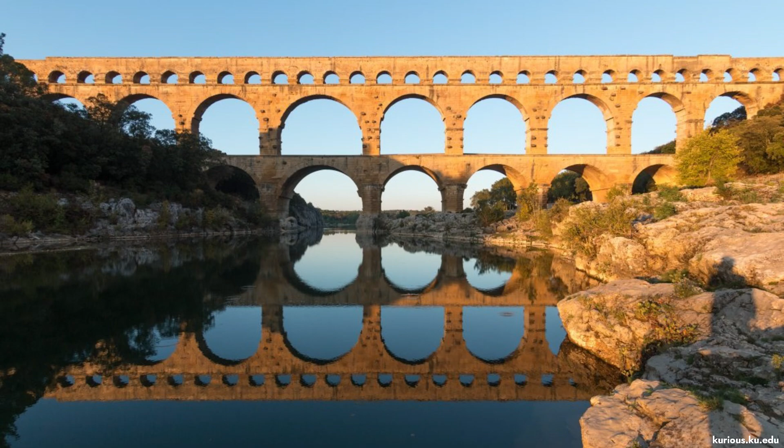Concrete is not a new material. We all know this. There's a lot to do about Roman concrete and its qualities and why it's lasted so long. And it's true, there's a lot of interesting properties associated with it, but one of the reasons why it had lasted so long was that the material was being really utilized in a way that makes most sense for what concrete is. Ultimately, concrete is a compressive material. It's rocks bearing on other rocks. The cement is what holds it together, but ultimately it's that aggregate interlock and pushing against each other in compressive forces that makes it work. And actually the lack of reinforcing in a lot of these structures is why they were able to last so long, because corrosion of the reinforcing is ultimately the downfall of a lot of concrete structures we see today.

One of my favorite buildings out there is the Ingalls Building in Cincinnati, Ohio. I did a project in Cincinnati, I was traveling there all the time, so I got to go check it out. It's been recently renovated into a hotel. When built in 1903, it was 16 stories tall, and people could not believe that concrete could support its own mass because it's so heavy. So there are stories about this entire building being built on shores all the way to the top. And they knew the date that they were going to pull those shores to see if it could support its own weight. And there were photographers lined around the streets to get that photo of this thing collapsing in on itself, which of course did not happen. It's a very interesting building. I recommend you check it out now that it's a hotel.

But a great case study in why concrete makes sense in a vertical application, because of its compressive nature. Stacking concrete and load bearing in a compressive way on columns makes a lot of sense. And of course, the sky's the limit now with the Burj Khalifa, the tallest building in the world.

I was super fortunate to work on that project, my first day in the office at SOM. My boss at the time was very dramatic. He was like, all right, we got to deal with all these RFIs, we got to make these things happen. And it was very exciting.

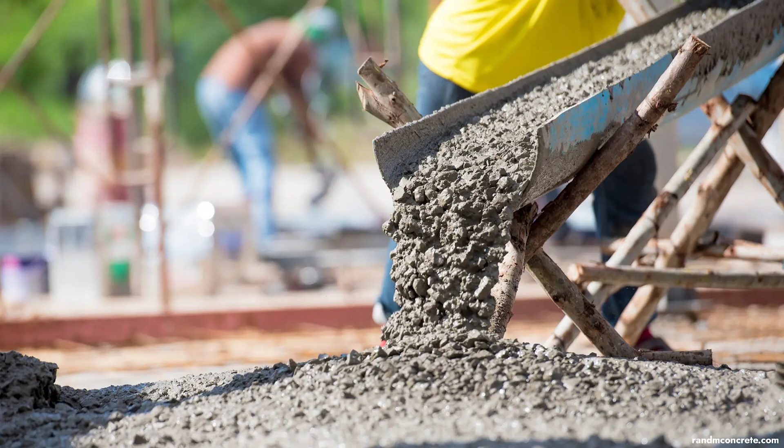Yesterday I listed the mixture proportions, very simple for concrete—I believe it was 1 part cement, 2 parts sand, and 4 parts aggregate. And water is a very important part of the mixture, about half a part; that water to cement ratio is really important. But ultimately, at the end of the day, it's rocks bearing on rocks in compression—that's what concrete is. The cement and the rest of it is just trying to prevent it from bursting, to prevent those rocks from slipping away from each other and splitting as you go through. So that cement is really just something that enables the full capacity of what that concrete can be.

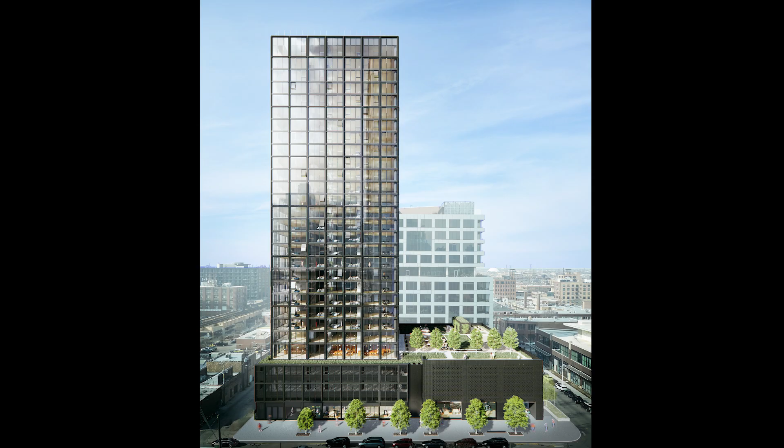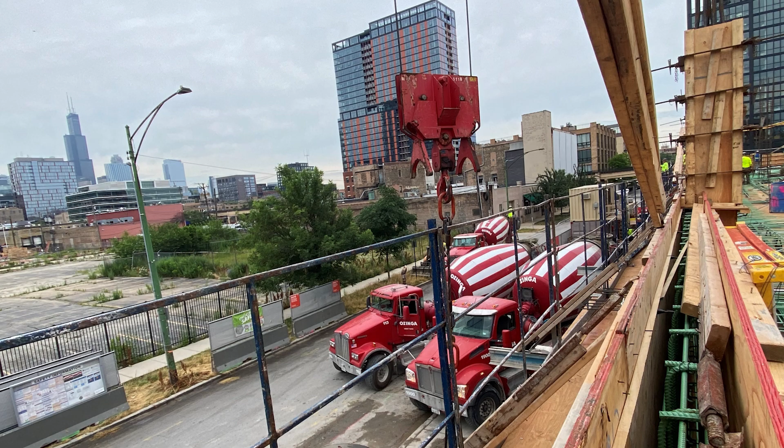And so as that building is going up, you just got the concrete trucks parked up. They're not dumping it into a hopper, they're dumping it into a bin that's pumping it up to the top. So you have continuous concrete placement from start to finish. Watching these buildings go up is incredible.

The tradesmen have an unbelievable amount of knowledge that you do not get in the design studios. Each one of these floors takes 3 business days to build. Day 1, they build the formwork. Day 2, they put the reinforcing. Day 3, they pour the concrete, and then they start again. 3 days at a time. All incorporated in that is all of the in-floor plumbing, the conduit. It is an amazing dance of all these different trades working together.

And so to that end, concrete material strengths have become really important, but it's the high early strength that we care most about. This building has concrete slabs with 8,750 PSI strength, stronger than any of the concrete in Marina City. It's being done so that they can stress those tendons and advance as quickly as possible. The strength of concrete we use just in a horizontal application was the dream of the concrete industry to go vertical just a few decades ago.

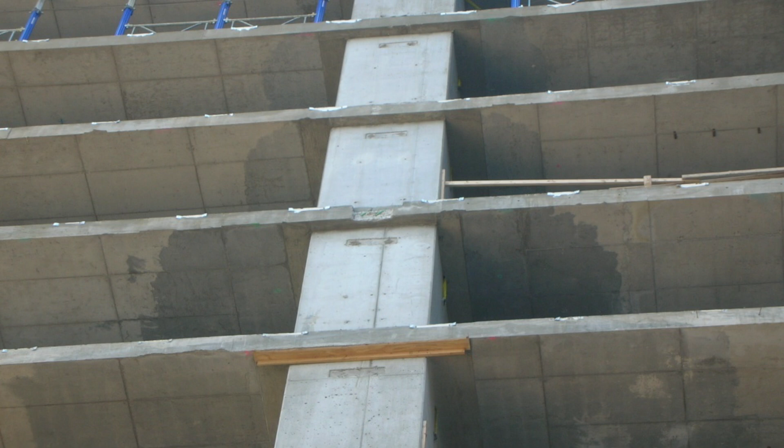Another innovation has been just about stripping away anything that slows us down. This is a photograph not of 220 Ada Street, but another prominent project here in the city, where the concrete slabs wanted to be a 5,000 PSI mix, but the vertical concrete wanted to be a 14,000 PSI mix.

And if you have a concrete column and interrupt it by a floor, that 14,000 PSI concrete column will crush that 5,000 PSI floor. So what they do is a pretty rudimentary strategy, which is they get a bucket of 14,000 PSI and dump it where the column goes while they're pouring the floor slabs. If you look at that column stack as it goes up, you'll see a discoloration between a lightly colored gray, that's the 5,000 PSI concrete, and a more darkly colored mushroom, as they'd call it in Australia, of the 14,000 PSI concrete. That's how you go up.

But that really slows things down. A friend of mine, Paul James, would say that puts sand in the gears. That's a Paul James saying. You got to get the sand out of the gears, is what he would say.

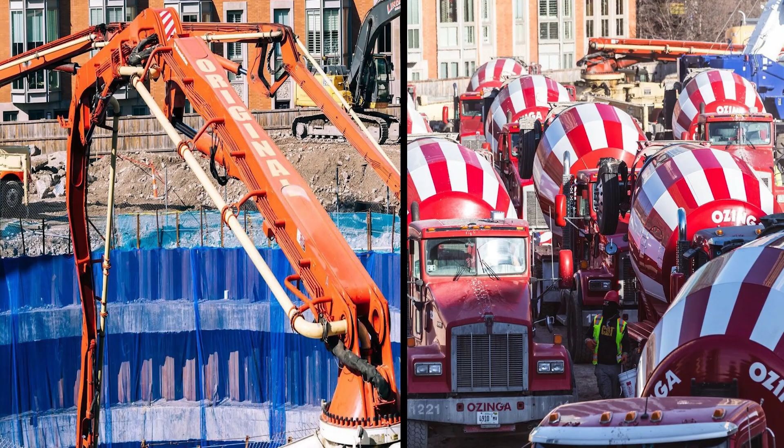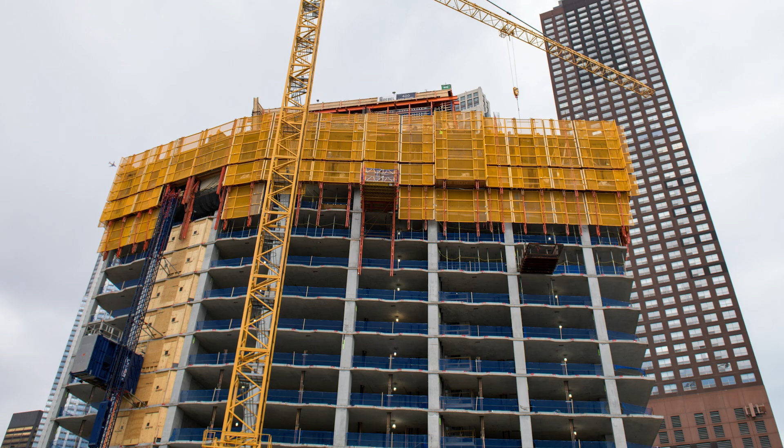So you really do not want to just throw concrete down a hole when it's a high-performance material. You want it to be controlled. So even though it's the simplest thing in the world, drive a truck up and dump the concrete in a hole, we still choose to pump it so we can place it precisely to avoid those kind of challenges. Here's that construction process as it goes up - same criteria, a 3-day cycle, post-tensioned and all the rest of it. But in this building, we're actually using 10,000 PSI concrete on the lower level slabs to avoid all that puddling, to avoid all that mushrooming.

So the innovations over and over again allow us to use those 15,000, 16,000 PSI mixes. Now we tune the floors and the columns because speed of delivery is really the key to success on these buildings. So when I think about all the concrete innovations that got us here today, I put them into four major groups.

I'd say concrete performance and high strength concrete, post-tensioning cables, the ability to pump concrete so you don't have to rely on the crane, and self-advancing semi-autonomous formwork systems that climb up the building and get it built.

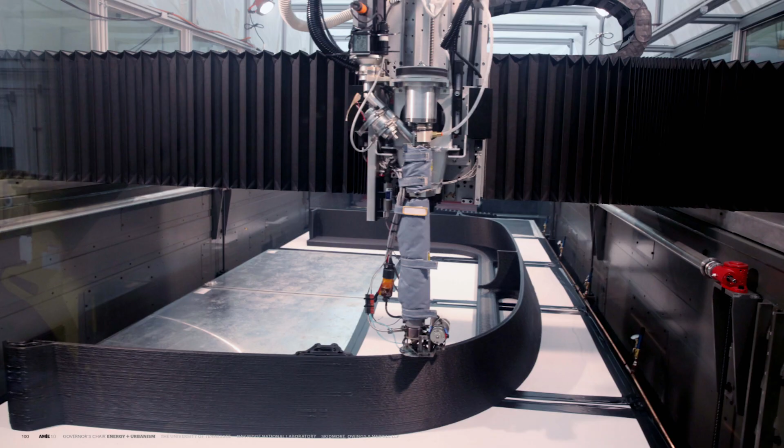That's kind of an obvious corollary to what I'm going to talk about next, which is 3D printing generally, but concrete specifically. This is an image of 3D printing at Oak Ridge National Laboratory. This is a carbon fiber reinforced ABS material that we did as a demonstration project for the DOE.

We 3D printed that building on the left in a bunch of different segments and then post-tensioned it together for good measure. We 3D printed that little staircase that you go up, and we 3D printed that Jeep as well. You can see the oak leaf on it there.

At the time, it was a really nice reunion because Phil Enquist, who was the governor chair at the time, we pulled together all this great imagery from back when SOM was young and helped design the Oak Ridge campus. So it was this kind of reunion of these old firms.

As an outcome of this effort, we put on an exhibition at the National Building Museum called Secret Cities, about the development of Oak Ridge and the atomic bomb.

As a result of that collaboration, we got another government contract with the U.S. Army Corps of Engineers, at the Construction Engineering Research Laboratory, which is right there at the UIUC campus. There's a lot of changeover between the UIUC campus.

They approached us to say, look, we've been experimenting with 3D printed concretes, and we'd really like for a design firm like you to take a look at it from a first principle standpoint, talk about code development, how we could get this thing over the line.

They had already 3D printed this building, which we were not involved with, and they built it inside of a shed, so it's protected from the wind. Straight extrusion walls, got a wood roof on it, all that kind of stuff, and it's got these really crude connectors around the outside.

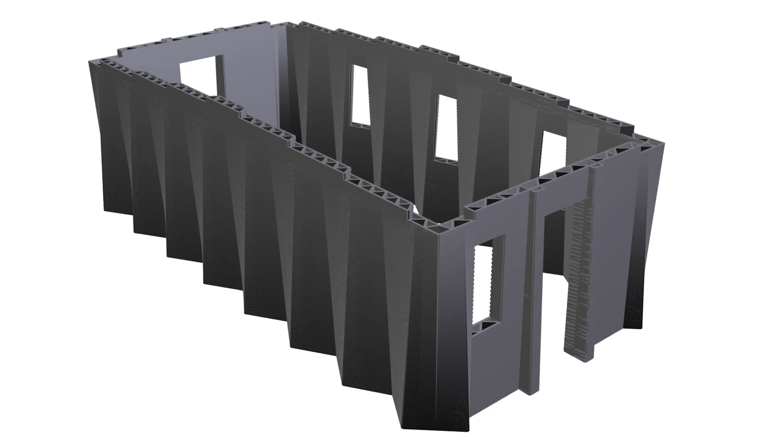The nice thing about that is that when you talk about 3D printing, you just want to show up and do it, right? You don't want to have all these other systems that it relies on, so it unencumbers the concrete walls from the rest of the building systems to support itself.

So we wanted to do this demonstration, which was a 24-hour print. We were going to start at 10 in the morning and go to 10 in the morning the next day to show and demonstrate this technology.

This was the first run. You can see this morphing wall that starts as a corrugated pattern and goes up to a straight wall at the top. And it was damn hot that day. I mean, it was not fun.

You can see the concrete mix there is kind of slumping a bit, right? And you can see all this kind of purple curing and sealing compound on there.

The trick of 3D printed concrete is really not the robotics, it's the material science. How do you get concrete to sit on concrete that has just been placed so it doesn't smush everywhere, but it's got to be liquid enough that it forms a bond, and then you've got to run ahead.

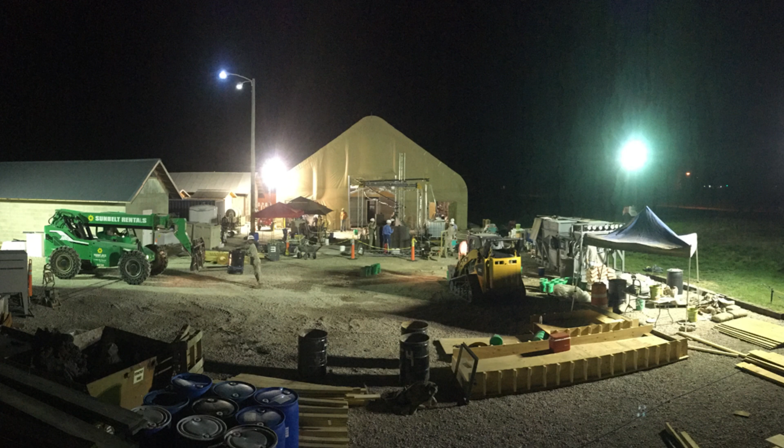So it was difficult during the day, and then it was tough during the night. This was the operation. You can see the printing that's happening on the left there. The Sunbelt Rentals, they're loading it in. On the right-hand side, beyond the tent, that's their admixture apparatus that would put all these things together.

I climbed up on some old barrels to take this photo. It was like midnight. Just watching them go ahead, it was pretty incredible.

The Army Corps called in the Marines to help because they wanted to have it kind of like on-the-job training. These guys had never really done any 3D printing, but they said, we want to come in and take care of this.

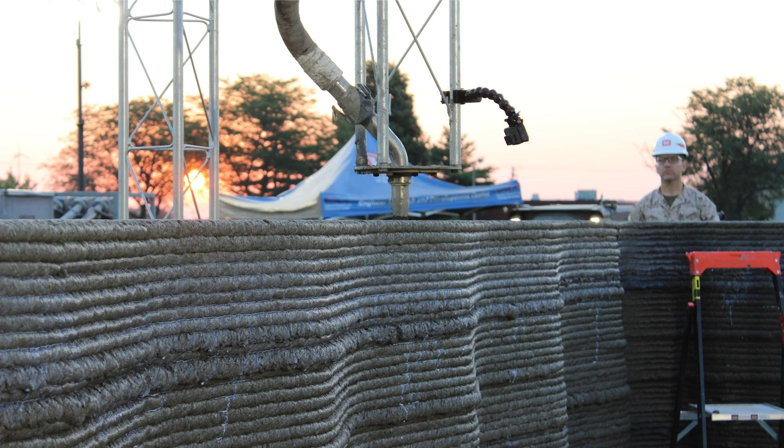We printed through the night, and this was dawn. I got up on a ladder to try to get this perfectly, with my cell phone. I'm like, I've got to get this line of printing exactly perfect with the sun coming up. And Captain Friedel is in the back there.

What he's doing is controlling the speed of the printing, because depending on the quality of the mix, if it's too loose or too tight, you've got to go faster or slower. So he was driving the ship by the time we got through the morning.

And that's what it looked like after the fact. Pretty rough. 3D printed concrete has come a long way, but I think it's a really nice demonstration of what can happen next. In Eaker's talk, he was talking about the fabric forms and the plastic forms and all these different things. It really is new technology that drives new architectural forms, and certainly 3D printing concrete is a very attractive option moving forward.

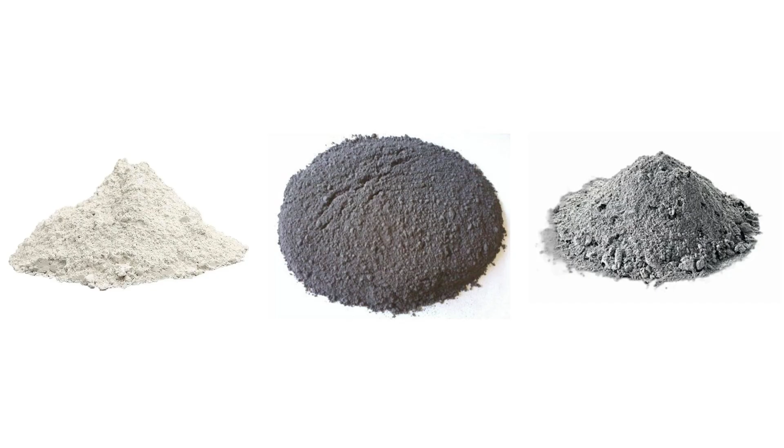On the left-hand side is ground granulated blast furnace slag, a byproduct of creating steel. In the middle, we have silica fume, a byproduct of creating silicon components. And on the right-hand side, fly ash, a byproduct of burning coal. All those things are pretty tough.

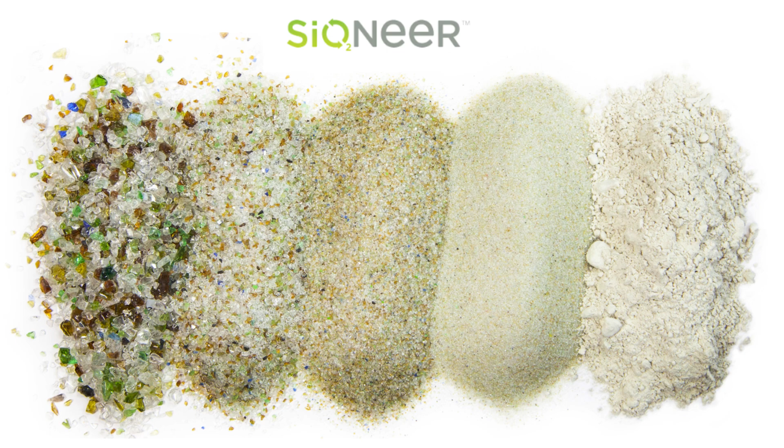Putting those things together, we've been working with other companies on how to do this, like Sioneer. They're looking at replacing silica fume by using ground glass, recycled glass, to get it down to its constituent parts as a cement replacement, getting that carbon out as a waste product from another industry, but not a waste product from an industry that's burning coal.

I did want to talk a little bit about another company, Prometheus Materials. They're looking at using algae-based cement replacement, where you grow this algae, dry it out, grind it up just like the others, and then add in some other components to get this cement.

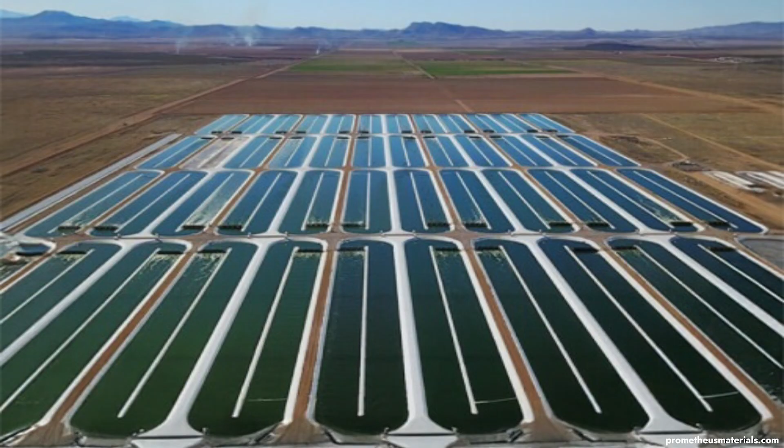At the biennial a couple of years ago, we wanted to showcase this with a pavilion we called the BioBlock Spiral. We used research from some test builds using it as a block form. It could be used as concrete, but we studied it as a block in an exterior application.

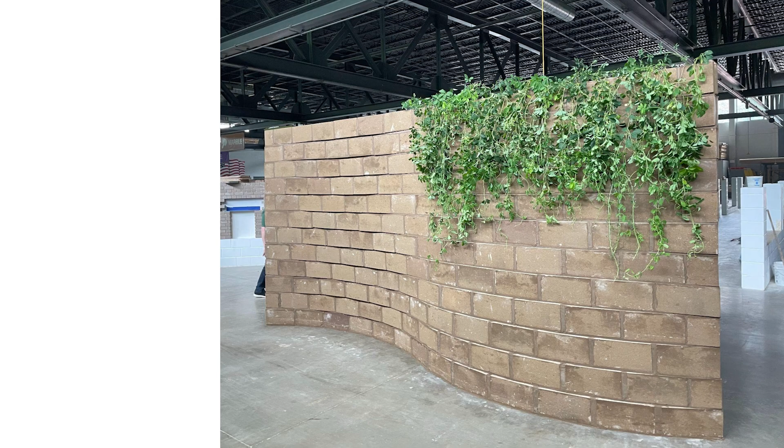For the biennial, we built a demonstration pavilion in the Fulton Market area, where we wanted to look at the acoustic properties of this material. It's more acoustically absorbent than traditional cement, so we looked at some different forms and settled with this spiral here.

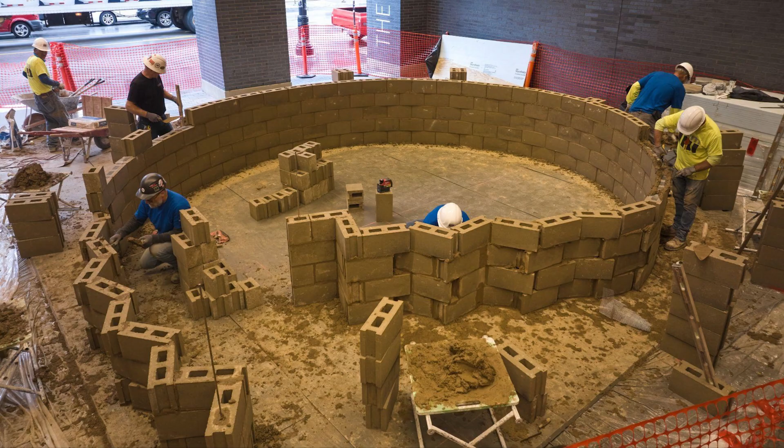Although it's a unique material, it goes together just like conventional blocks. Here are some construction photos of it going through. It's got an earthy smell to it when you're making algae-based cements, and that's that.

And lastly, I wanted to talk about just two other things. We're talking a lot about concrete buildings and concrete frames, but concrete is everywhere, and it is ubiquitous. This is a very well-known building in the city, obviously made out of structural steel.

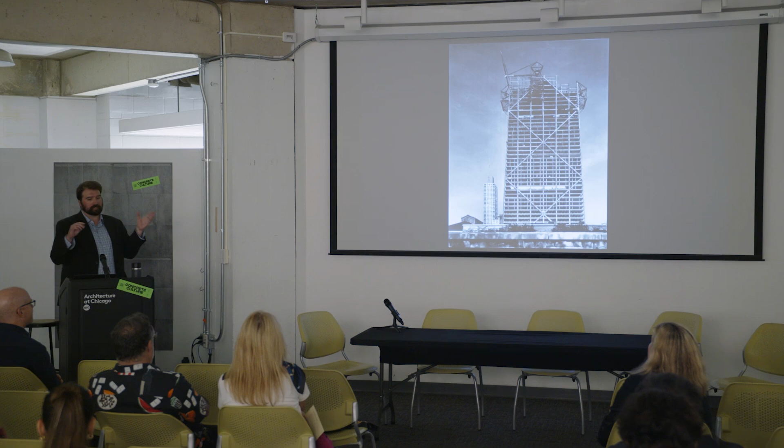Going back to the idea of how concrete is made with one part this and one part that, by weight this is 2-part steel and 3-part concrete. There are lightweight concrete slabs in this building, but most of the mass comes from those slabs and not the structural steel frame. Here's an image of level 16 about ready to get poured with all the rebar in there, and you can see the formwork placed in there.

It wasn't using composite metal deck. If you think about that steel beam, it's there to hold up the heavy concrete slab. That steel beam is held up by a steel column, which is braced by the steel mega bracing. All of the mega bracing is holding up the columns, holding up the beams, holding up the slab. It's the slab where you have most of that mass, so we try to attack that material to make it more efficient, including in timber construction.

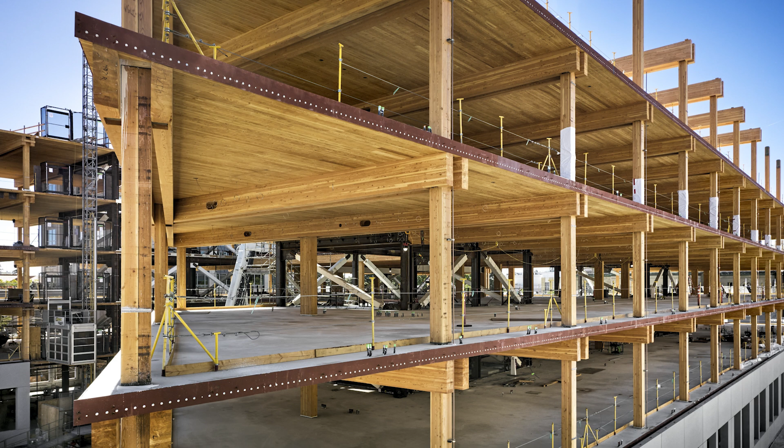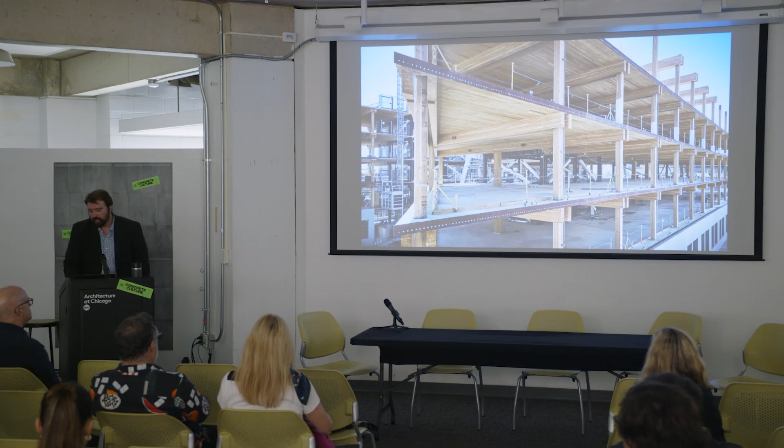Concrete is great because it has really nice acoustic properties. There's a building of ours in California where, although it's an overall mass timber frame, we have non-structural concrete topping slabs that help level out the floor, allow for electrical boxes, and give other nice benefits, but it was not made structural. So looking forward about concrete, it's not just about concrete frames, in my opinion, it's concrete in all of its applications. We've been doing a lot of first-hand research on timber-concrete composites, where we take a timber element and reinforce it with a concrete slab using specialized connectors, so we can both increase the performance of timber structures to be more compatible with other building frames while using less and less concrete along the way.

Okay, that's what I had for you. Thank you.

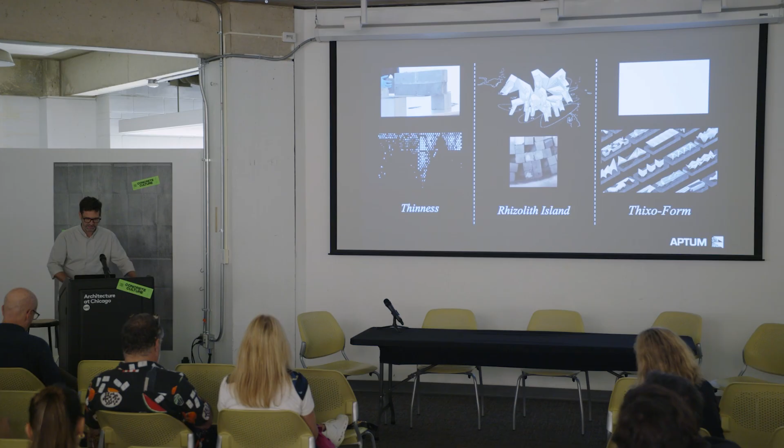In what follows, I will present three approaches, each based on concrete mix technology that alter typical standard reinforced concrete towards a specific performance. Broadly, the first is the idea of thinness: slender and delicate, based on an increase of flexural strength of the mix. The second, Rhizolith Island, explores buoyancy and delicacy, based on mixes that focus on density and porosity. The third, Thixo-Form, works with foldable concrete made possible by precise control of mix workability—each intended as an experiment in the reimagination of concrete's agency.

We see these investigations not merely as a formal exercise or technological demonstration. Each is a proposition about how we might draw other futures into the scope of our present moment. Digital fabrication, environmental performance, and the tectonics of assembly are treated here not only as means to an end, but as sites where material, form, and environmental context dynamically negotiate with each other in real time.

In collaboration with CEMEX R&D, for an exhibition at the California College of the Arts in San Francisco, we developed this small pavilion called Thinness—an ultra-thin concrete pavilion that pushes spatial structure to its limits. Here, structural capacity is achieved by a skin whose very thinness redefines its strength principles. Cuts articulating the roughly 1.5-inch-thin vaulted surface are designed to dramatize the skin as structure, here compared to a typical concrete wall at the same scale, marking a deliberate shift from the traditional massy volumetric conception of concrete toward the filigree, tactile, and fragile.

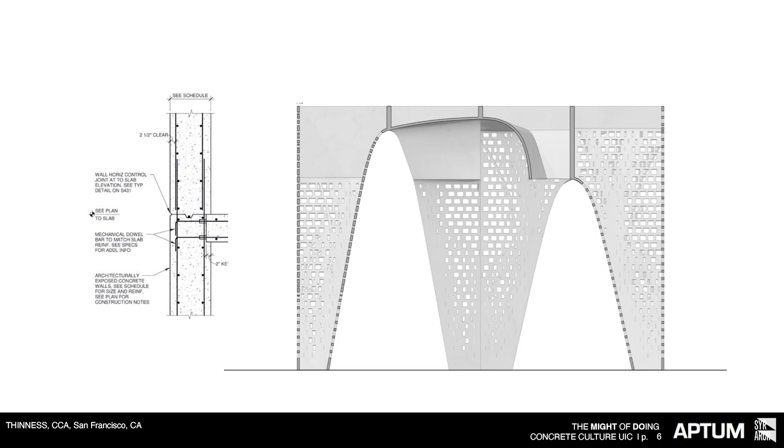Similarly, when a column 9 feet in height can be carried by 2 people, the act destabilizes deep-seated associations of the material with weight and inertia.

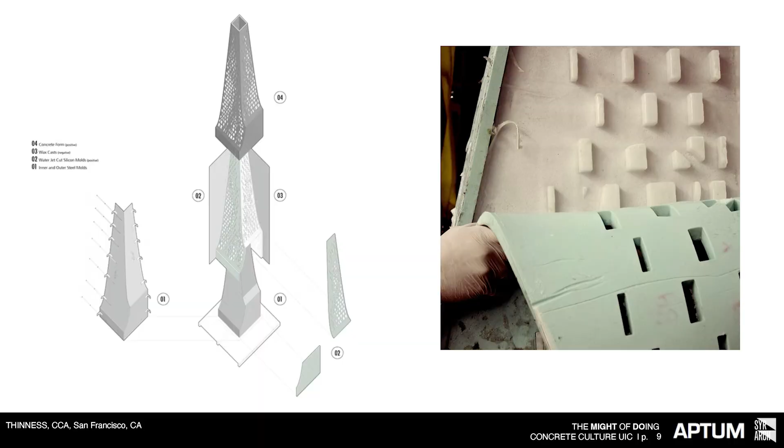Behind these apparent performances lies a multi-pronged iterative methodology combining computational modeling, experimental material science, and tactile craftsmanship. Computational tools allow complex simulations of stress, strain, and failure in ultra-thin shell surfaces before any physical casting, enabling optimization far beyond traditional empirical boundaries. Concurrently, research into concrete mix development—adjusting particle size distributions, fiber reinforcement types and quantities, admixtures, and curing protocols—is extremely important to ensure the material can meet these radical formal ambitions without premature failure. Finally, the craft of making—the delicate moments of pouring, supporting, folding, or lifting—constitutes a mode of embodied knowledge and feedback, a dialogue between design intention and material response that enriches rather than merely confirms the computational models.

This cyclical research-fabrication dialogue offers a challenge to the conventional architectural workflow, which often accepts material properties as a fixed, given aspect of products and systems rather than variables to be interrogated or recalibrated.

In the Floating Rhizolith Island project, we interrogated the long-standing presumption that heaviness is concrete's defining physical characteristic and constraint. By introducing lightweight aggregates, air-entrained technologies, and unconventional casting protocols, we induced buoyancy, enabling concrete elements to float. These buoyant concrete modules serve as experimental platforms for exploring both the material's structural boundaries and its expanded ecological agency.

Here, the reimagined concrete raft becomes a living substrate designed to support and accelerate mangrove and oyster restoration efforts in vulnerable coastal ecologies. This proposition challenges the traditional notion of concrete solely as an inert, static, and often environmentally destructive material, repositioning it as a potentially regenerative agent in climate-adaptive landscapes. Its failure is intended to be part of the stabilization of the habitat it provides.

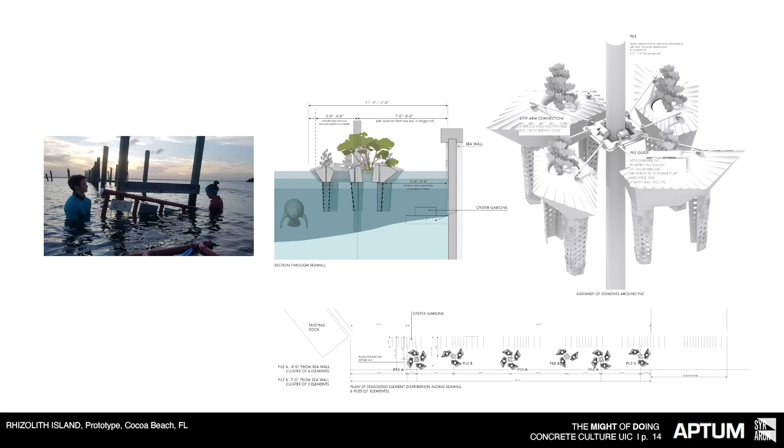We developed this together with the Smith Group Coastal Engineering and the municipality of Cocoa Beach, who reached out to us and wanted us to work together with them to investigate the possibilities of these systems. They were tested together with local marine biology researchers to see in what way the concrete could be a good substrate for oyster growth.

You see some of these testings on the very left. We installed a series of small prototypes that were pre-spawned for oyster growth and tested for mangrove development.

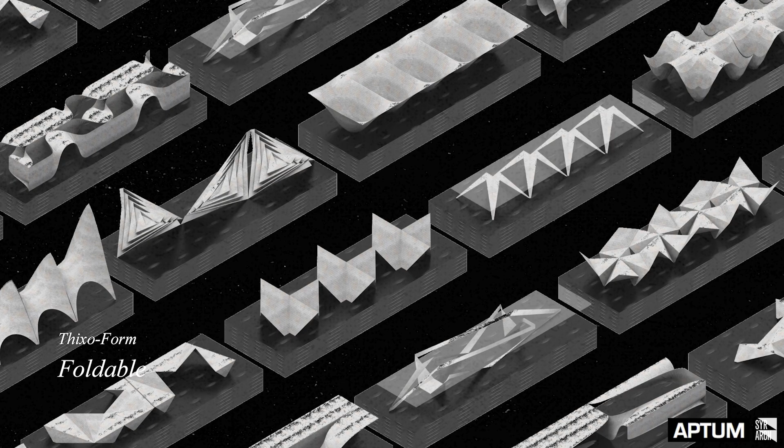The third and most current experiment, Thixo-Form, explores folding not only as a structural strategy—such as folding typically used in concrete, for example in Felix Candela's projects, or as we saw yesterday with Miguel Fisac's incredible project that Iker talked about—but as a fabrication process in itself.

Folding increases structural strength and stability without increased mass in various materials like paper, metals, or fabrics—anything you can fold. However, in concrete, folding has historically been more simulacral than literal, cast into static molds designed to give the appearance of folds without the material itself undergoing actual folding deformations.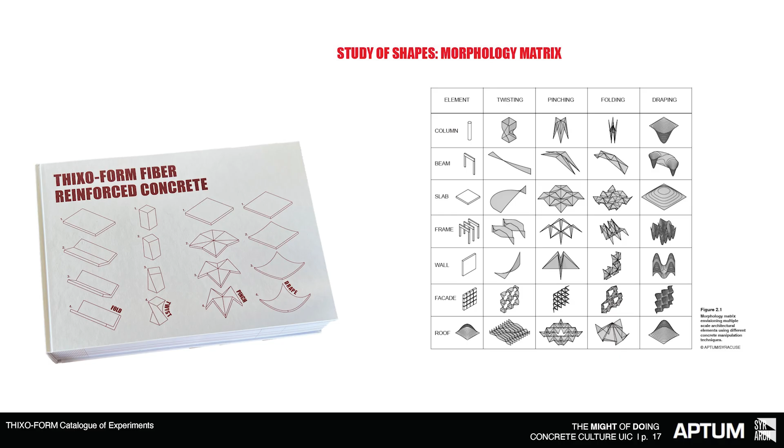Thixoform, in contrast, uses innovations in concrete mix flow deformation properties, particularly thixotropic, or the time and touch dependent behavior of the mix, that allow a literal folding during the curing process of the concrete. This approach broadens both formal repertoire and construction economy.

In a kind of folding playbook, we documented a whole series of experiments that explored how this fabrication method might cultivate mass reduction, simplify prefabrication workflows, and facilitate disassembly or reuse.

Institutional constraints, such as building codes, long a bottleneck to experiment-driven innovations, are gradually evolving. Newly emergent standards covering fiber-reinforced systems like carbon fiber-reinforced polymer (CFRP) or steel fiber-reinforced concrete (SFRC), and revised cover and durability requirements, become instrumental for legitimizing these advanced concrete applications.

From these experiments, I want to showcase two in more depth: a first one that explored robotics at the Autodesk Build Space in Boston, and a second one we are actually working on right now that builds upon the Autodesk work and strives to develop a Eurocode compliant precast structural system for a very small carport structure.

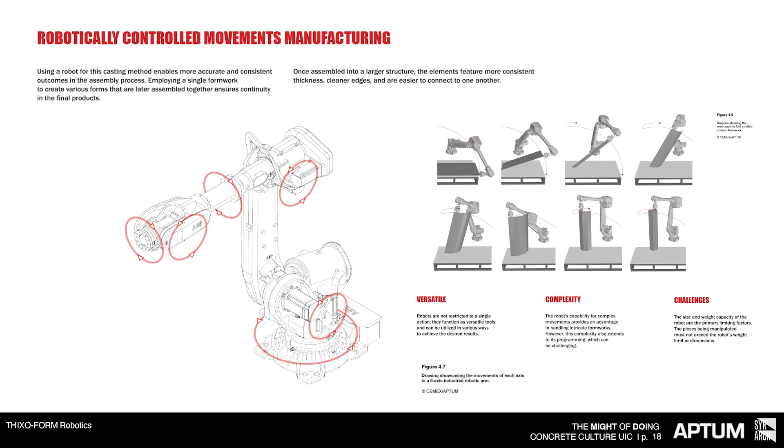At the Autodesk Build Space, the folding was realized through the use of large-scale robotic arms, allowing for the needed amount of payload to lift the material. So we required a very large robot.

A key aspect of the cast is the relationship between the curing curve and the speed and orientation of the arm movement. That has to be finely calibrated so it wouldn't slump, guaranteeing a smooth transition from unfolded surface to three-dimensional casts without slumping of the mix in the formwork.

The intent is that the resulting elements can be assembled into complex spatial configurations. The first prototypes demonstrated the technique's feasibility, both in terms of process and the precision of the pieces themselves, allowing for consistent output and concise assembly.

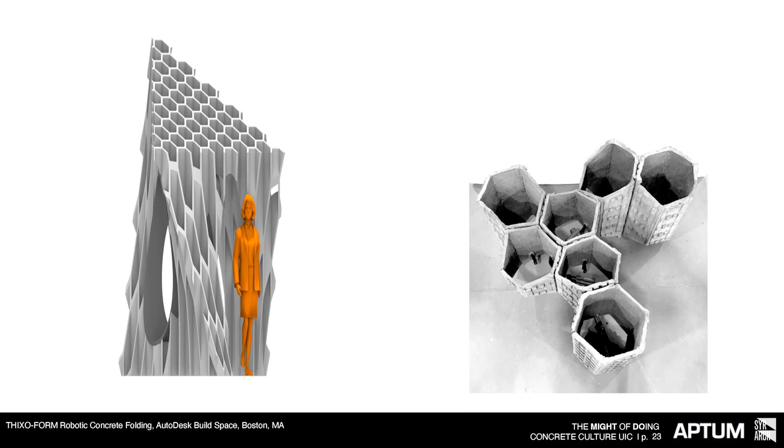Based on these initial studies, the aim was then to develop a robotically folded concrete block system that interlocks with a uniform pattern, providing a friction-locked connection between the blocks. We tested the system through the design of a small-scale pavilion.

For that, we developed a script that takes any volume and translates it into the information needed to fabricate the pieces, automatically splitting it into the needed amount of blocks and providing the unfolded geometry for the casting process. You can take any kind of closed polysurface into Rhino, and it automatically generates the geometry, dividing it so the heights of the modules coincide with the maximum length of the formwork, which is again a function of the payload of the robot.

This is cardboard. Due to the COVID pandemic, work at the build space had to stop. But at least we were able to use the time during the pandemic to build this cardboard prototype.

Still hurts a little bit.

At least this prototype was kind of similar to a theater ghost, occupying the atrium of our school during the quietest time during the pandemic.

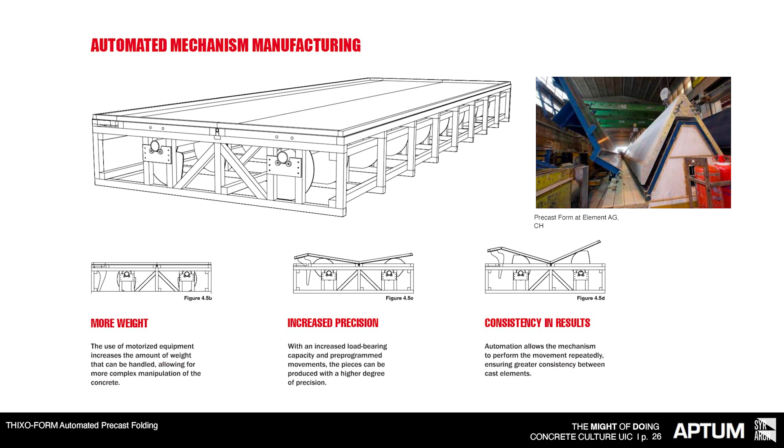Building upon the knowledge and experiences we made at the Build Space, we are currently working towards an industrialization idea for Thixoform. The goal is not to design a completely new fabrication process, perhaps slightly different than 3D printing, but to insert it into the already existing precast plant workflow.

On the left, there are some initial ideas of the kinds of machines we imagine could be built to fold the elements, and on the right you see actual precast formwork. This is a formwork that closes up for a rather complex concrete frame for a gym in Switzerland.

As a catalyst, we are using a request for the design of a solar roof canopy that we had. For us, this is ideal since the scale is rather small, but it requires serial production, code compliance for multiple locations, not just one, ease of assembly and possible reassembly, as well as integration of a minimal amount of climate and technical installation considerations.

But it was also very important to us that the process, like in the robotic folding project, would allow for formal flexibility, attempting to work towards the integration of a digital to physical workflow.

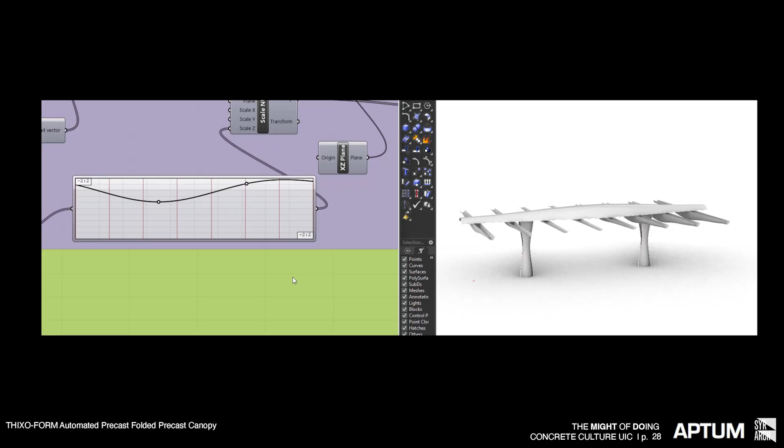What you see here is a very early model to conceptualize this approach. We decided that for now we really focus on the development of the technical aspects of the fabrication process of the elements itself, with the intent to revisit this way of thinking about the relationship between digital and physical workflow once we know exactly the parameters given by the fabrication process.

So with the aim to keep it as small as possible, the prototype is then intended for just one car.

The structure is based on two columns that support a beam spanning 11 feet, supporting three cantilever joists about 19 feet in overall length, with the larger cantilever measuring about 12 feet. This, compared to the work shown before, is very, very small.

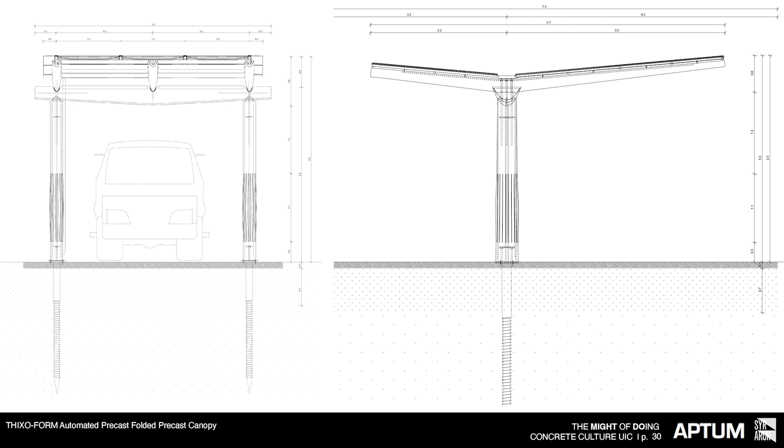The elements are intended to be assembled with typical rigging, joint and bearing pad components that are standardly used in the precast industry.

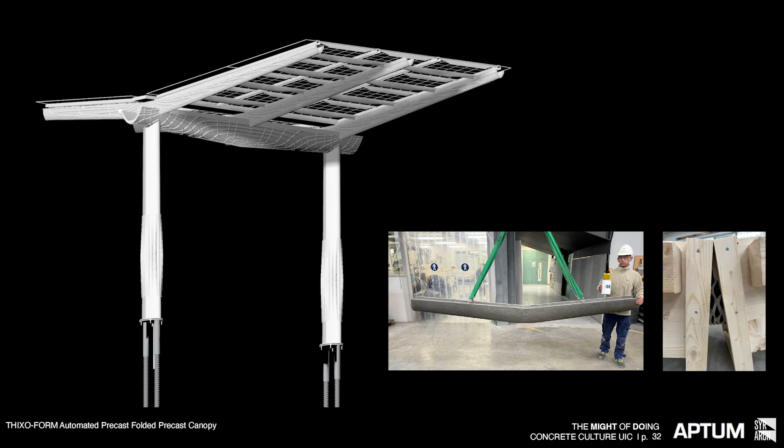The major challenges are to create a fabrication process that increases the amount of formal outcomes by inventing formwork that can fold to varying degrees and allows for simultaneous bending in the opposite direction of the fold, as needed to generate the inclines of the cantilevers.

The limiting factor for the thickness is not actually the concrete, but rather rebar coverage, which was reduced by the introduction of the Eurocode—I think this was 2021, the Generation 2 Eurocode—allowing for more slender dimensions and, with that, also a kind of weight reduction.

The engineers working on the project are also continuously testing prototypes of the folded elements against their calculations, to build out a more general data set that can be used for future applications, testing the structural limits beyond the occurring loads in the carport itself.

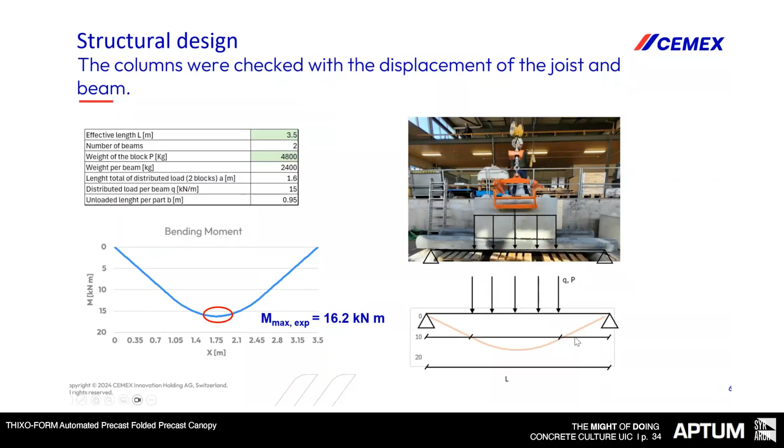While the folding provides for a weight reduction, the fabrication method also allows for very easy ways to adjust the forms of the members through cost-effective foam inlays that are independent of the larger reusable formwork. This, for example, enables complex interlocking geometries between the columns and the beams.

Another challenge is the requirement for continuous rebar in the tensile zones. By ensuring they are embedded in the outer edges and creases of the members, and otherwise using fiber reinforcement, we can avoid complex rebar bending that can pose a major planning and labor challenge in traditional prefabrication.

We are most currently also looking into an option to use—this is the rebar here, and this was just sent to me yesterday—CarboDur, a carbon fiber laminate, to replace the rebar. This is also made possible through the latest Eurocode implemented in 2021.

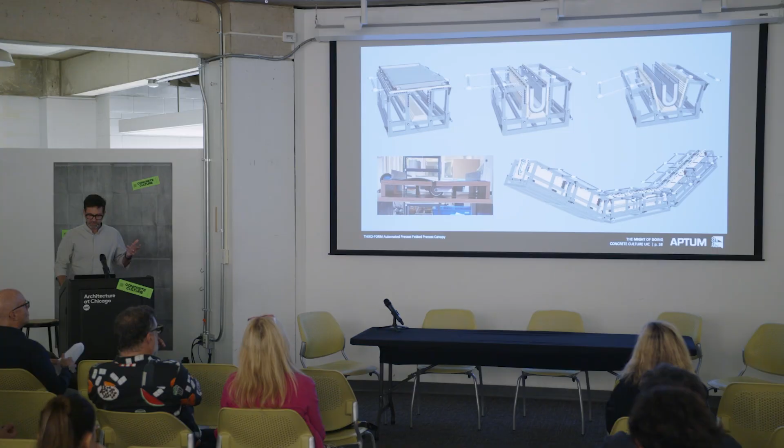We are in the process of scaling up the mechanical aspects of the work, allowing us to automate the folding process in an effort to control the relationship between mix and formwork movement. Simultaneously, CEMEX is also working on the development of a special coating for the foam inlays that will allow the casts to create intricate patterns.

In this case, an abstraction of the principal stress lines in the joists, the cantilevering joists and the beams, with the intent to reduce material where it structurally is not necessary. And this is a few early prototypes of that, showing the pattern and the reduction of material thickness between the stress lines.

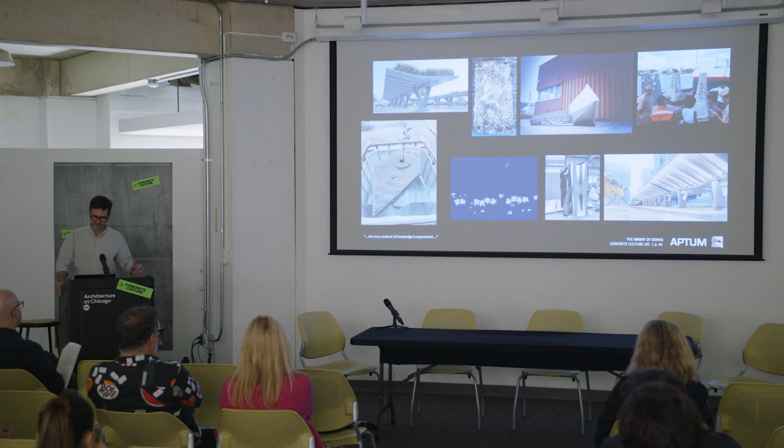So, in conclusion, if the earlier sessions of this conference have rightly focused on what we did and what we are doing, then perhaps the proposition here for the might of doing aims to demonstrate that to do by prototyping, experimenting, and making is itself critical form of research and intervention to shape the future. The speculative, the unfinished, and the provisional are not detours from architectural practice, rather they are a foundational condition for its ongoing renewal and recalibration.

As material futures become increasingly negotiated arenas of ecological urgency, technological evolution, and inherited disciplinary knowledge, agencies must be understood not only as what is selected, but also as how those choices are enacted and prototyped, shared, and made accessible to broader architectural and industrial communities. The might here is not some abstract potentiality, but a collective strength grounded in sustained, careful making.

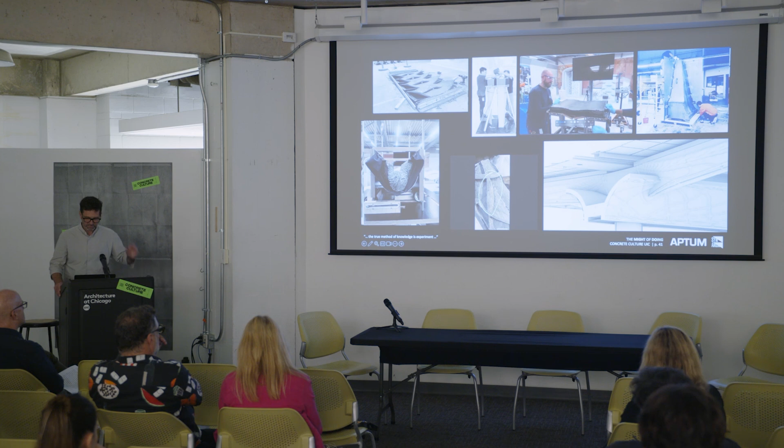We see this work as a contribution to larger discourses of work by others. I'm sure we're going to see an amazing presentation just after me, that is also focused on materiality and uses small-scale prototypes, pavilions, and projects as modes of investigation.

As part of this larger endeavor, we believe that reimagining concrete is to reimagine the architectures and ecologies it may responsibly sustain. By attending with rigor and openness to the might of doing, we become curators of futures in concrete culture that are not predetermined, but remain contingent and very much ours to experience and shape through experimentation. Thank you.

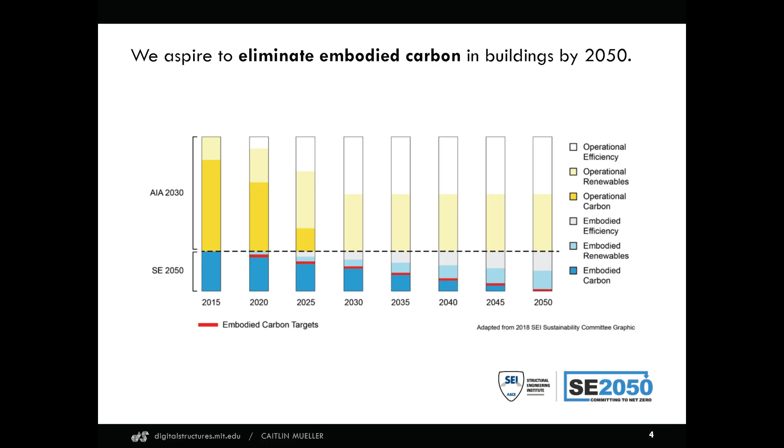A big part of the strategy here is to use more renewables to produce materials. This kind of green concrete and green steel movement is mostly the idea that architects and engineers can give themselves a break and just use nuclear energy and other renewables to create materials in the future. There's a lot of reason to like that idea. It allows us to continue to be creative and do whatever we want, but it also shirks a lot of responsibility that we have to this problem, and it's going to be incredibly expensive, and we're incredibly far away from doing this.

So what I'm going to argue for today is an alternative, complementary approach that allows us to get to zero by using what we already know how to do today, design and engineering, and the materials that we have, and just really thinking about them through this lens and moving to zero by being better at design.

I also want to point out, some people will say the solution to this problem is to just stop using concrete. We should just only use other materials because concrete is such a substantial emitter, as seen from this 8%. But the data doesn't back up that idea.

This is some data that the Carbon Leadership Forum, CLF, produced this spring, which is the result of a large-scale data set—well, not that large scale, several hundred buildings—that they were able to collect and plot the embodied carbon. That's what's along the x-axis, per square foot of floor area or per meter squared of floor area. Here they're spreading it out across the 3 different materials with the attempt to say, is one material more carbon emitting than the other?

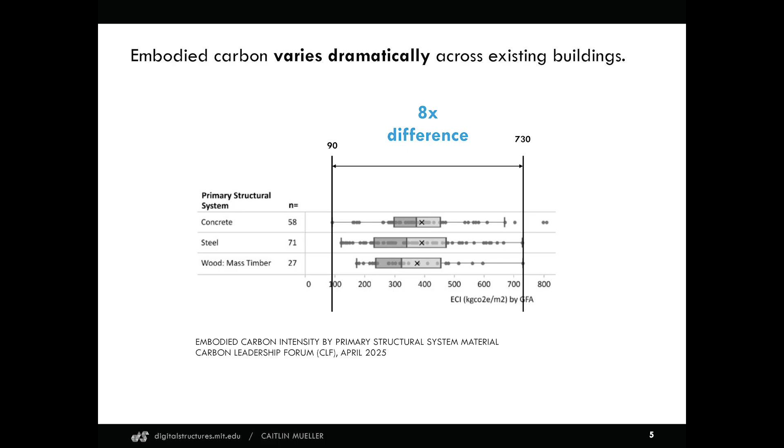I think this plot says no. The other thing that I think is really dramatic is that within the materials there is a tremendous variation. There's an 8 times variation in terms of how each of these materials intensifies its carbon impact. Again, my argument is that that is due to a question of design. It's which materials we use and how we use them, how we organize them in space to create enclosure and to carry structural load.

It's not just a question of a material, it's a question again of how the materials are organized in space. And this reveals both a challenge to designing in a way that is totally indifferent to our carbon impact, but also a huge opportunity that we designers can play a really leading role.

In a lot of my work, I try to do this through a computational approach because I find that having access to this information early in the design is really empowering to allow us to make good decisions. I use something called the design space. That's this plot here, for example, for this truss. If I change the geometry of the truss, if I make it shallower or deeper or narrower or wider, the total amount of material that I need changes. That's this relationship between geometry and structural efficiency.

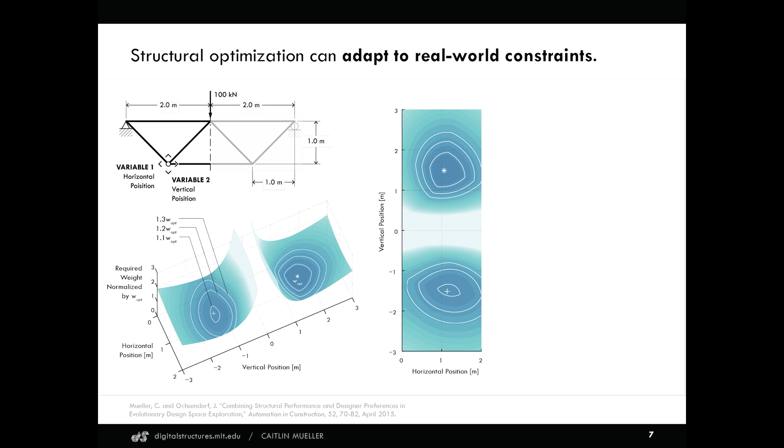I can use antique algorithms from the 1950s to find the very optimal solutions to these problems. These algorithms have been on the shelf for a long time, but have really rarely been used to design buildings because they're fairly inflexible. Architecture is not just about weight minimization, but it's about this holistic range of goals. But the design space also offers the opportunity for us to explore that. If we zoom back out and relax our goals or incorporate additional goals, we can use this computational approach to find ways to both save a lot of material and discover new forms.

Does anyone think the answer is yes? Yeah, the answer is definitely yes. We can carve away a lot of material. You may have heard that a good structure should follow the moment diagram. A moment diagram for this problem is just a linear solution. It turns out, because of the complexity of beam theory, it's not quite a linear pizza slice, but a square root function, essentially, that is the optimal shape. That allows us to save 33% of material.

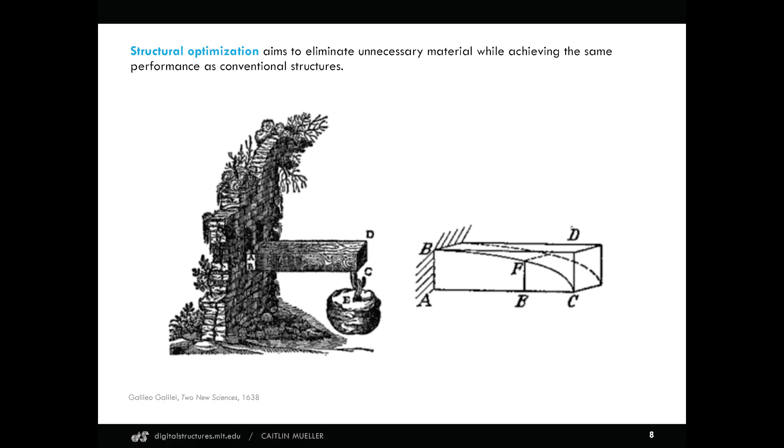So we've known this for hundreds of years, that there's this relationship between shape and structural performance, but we've stopped leveraging it, I think, because of an understanding of construction economics. Yet if we start to think about this again, especially in concrete, the opportunity is immense.

Concrete is especially amazing as a material because unlike that wooden beam where I have to cut off a third of it and then figure out what to do with that extra piece, we can be super precise about concrete and really use only what we need because of its plasticity and fluidity.

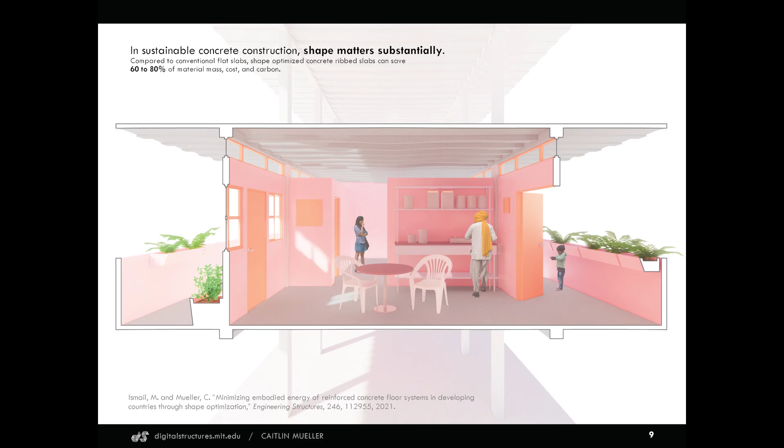This is kind of a spoiler of the research I'm going to show, but what we've seen is if we carve away structurally unnecessary concrete in ubiquitous elements like floors, we can save more than 50%. We can save 60, 70, 80% of total embodied carbon due to both the cement and the reinforcing steel. By making it more lightweight, we can use less reinforcement, which has really substantial effects and could be used in many very typical buildings around the world, and it has been.

We're also not arguing for necessarily a single solution. Different types of contexts will have different available formwork technologies and different kinds of accessibility to labor. So our argument is that we can have this menu of solutions, where we can integrate computationally what's possible to make, what materials are available, and then figure out how much we can save. This is a plot going from simple to more complex.

Even a flat slab can be optimized and often is not — exactly how deep do I need it, exactly how much rebar do I need, which strength should I use — those are still sometimes open questions. If we start to make it a rib slab, that's kind of the best bang for your buck. Ribs are really, really good, but we can continue to carve more and more away as we apply the Galileo techniques.

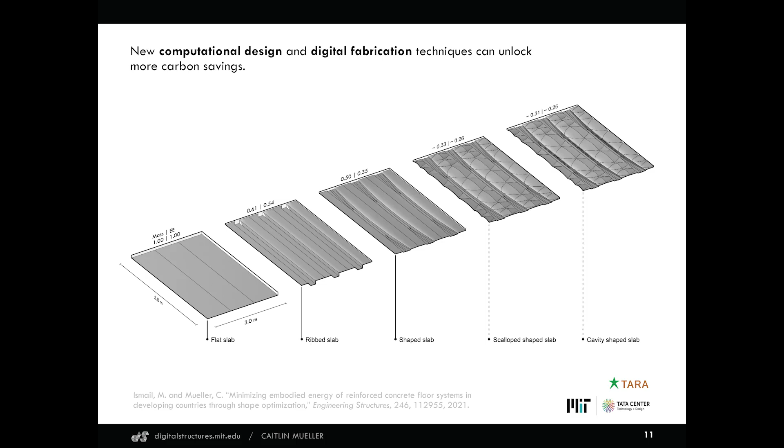The way we've been doing this in our research is by developing what's called a constrained optimization tool, which essentially parameterizes the outer boundary of the concrete and then runs structural analysis based on ACI building code at sections along the length to check shear and flexure, to make sure capacity exceeds demand, check total deflections, etc. So all of this meets building code today, uses today's building materials, and yet can result in substantial savings.

How do we build these things once we design them? We've been experimenting with that with a variety of different partners for quite some time now. This was a prototype we built with partners in India, where we had original funding to do this work to look at reducing the cost of construction of concrete housing in India.

We worked with a group that had a lot of expertise in manufacturing, and when we first showed them our beam and asked, can you make this beam? These are T-beams that get arrayed horizontally to create a floor. They said, sure, no problem. We said, well, at MIT we've been CNC milling foam to make the formwork — do you think that's a good idea? They said no, foam is illegal in India because of its environmental intensity. We said, okay, how else would you make it? And they said, no problem, we'll just get a giant block of solid steel and mill out all the steel.

And we thought, that sounds also very expensive, even though it could be used many times, because they were coming from mechanical engineering where they're making smaller things. So finally we said, well, how else do you build concrete in India? I see so much complex concrete. They said, oh no, we just use steel, laser cut it, cold bend it, and weld it together to make forms. We said, okay, perfect, let's do that.

The only problem was that our original design had double curvature that couldn't be achieved with cold-bent steel, which only allows single curvature. But our computational approach allowed Mohamed Ismail, who led this work, to remote desktop into his computer back in the US from Delhi and re-parameterize the problem so it only had single curvature. Half an hour later, he came up with a new design — slightly heavier, but not too much — that could be built using this technique, so we were able to build a 5-meter prototype and test it.

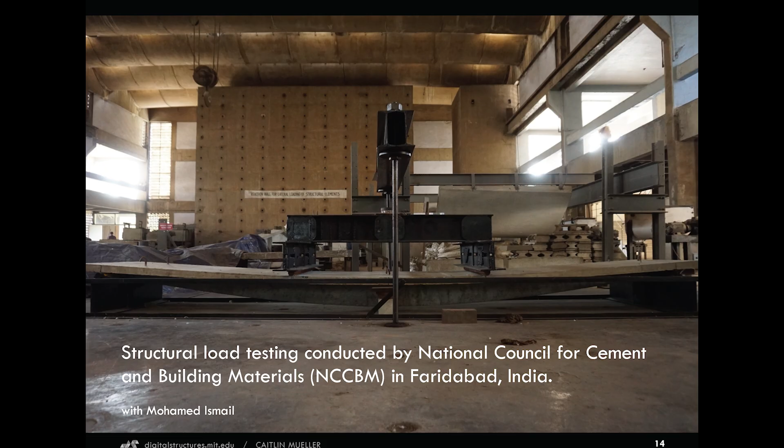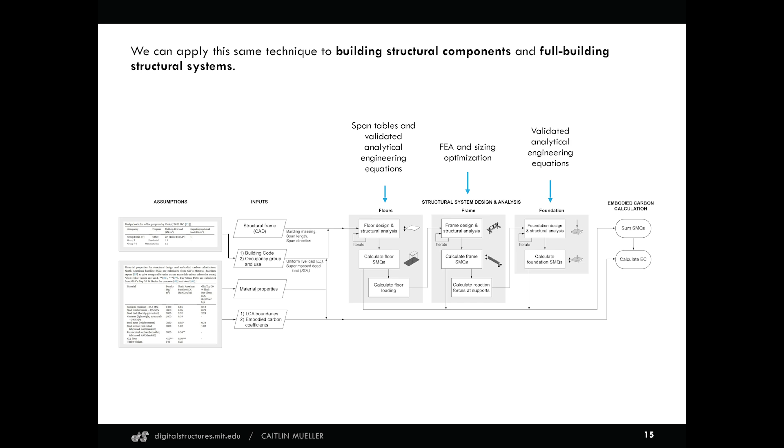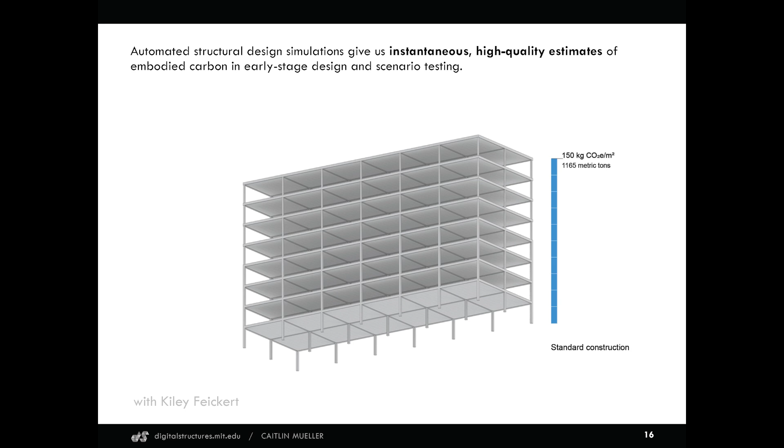This is a very high fidelity full building frame model we've developed for early stage design iteration. One thing we're trying to show here is that if we only change the material, the savings are very small. But if we integrate additional findings like lightweight concrete floors, reducing the column span — that's a huge one — and changing the types of foundations we use, we can get close to zero through design alone.

The other thing we've been able to study with this approach is comparing across different material systems for buildings. This is always controversial, because stakeholders from different materials want to make sure I've represented all of them fairly. So this is our attempt at a peer-reviewed, fair apples-to-apples comparison of the same building rendered in different materials with different design decisions. We did this to convince policymakers that they should enable designers to be part of the solution to the climate crisis, not alone depend on materials and alternative energy sources.

If we only change the material but nothing else about the building, we can save 16%. That's going to be really hard for us to get all the way to zero. But if we use a combination of design techniques — a better material, yes, but also reducing the column spacing, carving away unnecessary material from floors to make them lighter — the savings can be really substantial. This is at the full building scale, so it also accounts for lighter foundations; there's a knock-on effect.

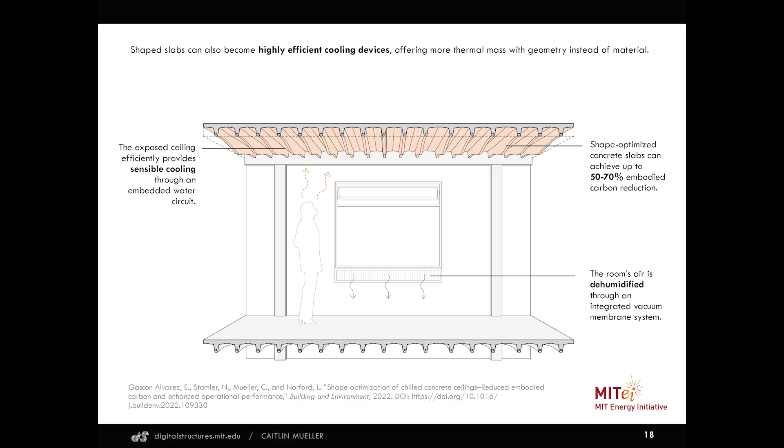That's what we did in this research project, where we looked at whether we could optimize the shape of the concrete to maximize heat transfer between the space and the floor system. Here we have activated hydronic systems providing cooling to the space, and there's an interaction between the shape and material properties we were interested in, to develop alternatives to air conditioning.

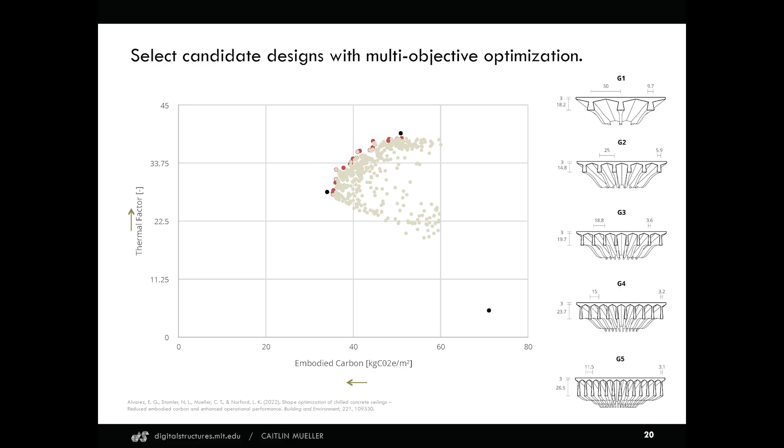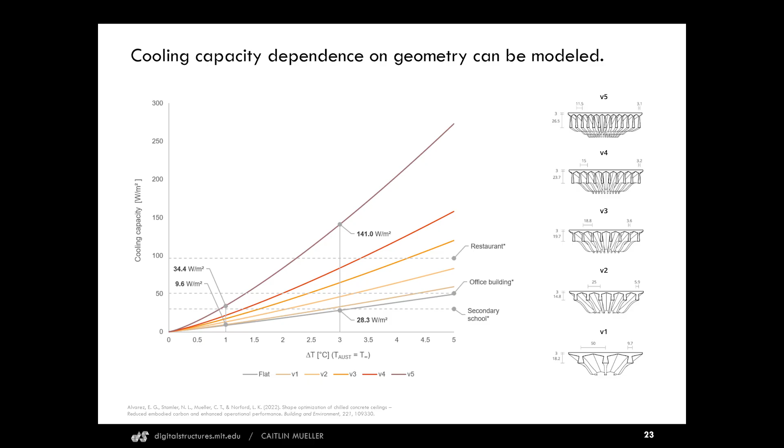Again, what we found was the shaping system can reduce upfront carbon and reduce long-term carbon through operational energy savings at fairly large percentages, especially compared to a flat slab with an air conditioning system.

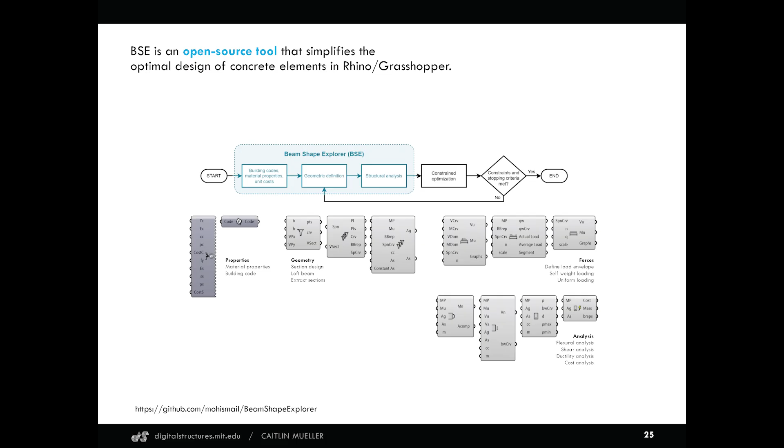We've started to integrate these tools and teach them to our students. Mohamed Ismail built this tool that wraps up the concrete optimization software I described into something accessible, so you can optimize any structure you want. We also asked a machine learning algorithm to take a lot of that data and see if it could learn the optimal solutions to produce results much more quickly.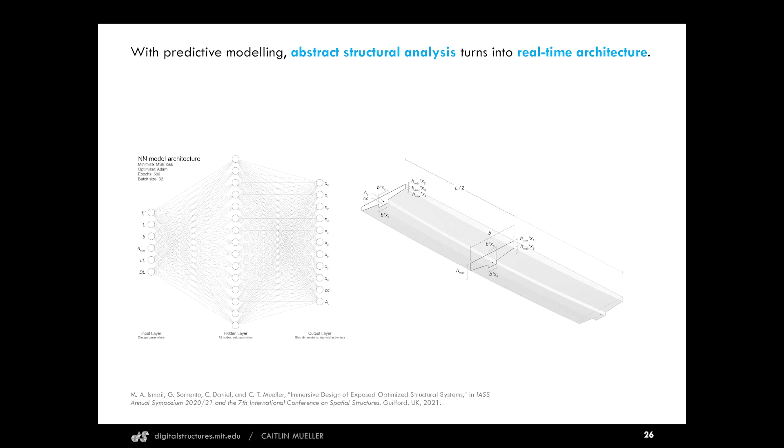This is a neural network trained with a lot of synthetic data from our optimization tool. We asked it: if I tell you my span, my maximum depth, my material properties, can you give me the shape of the efficient structure instantly? Our optimization tool takes several minutes, or maybe half an hour to run, but we were able to do this, allowing us to compare results instantaneously.

Once we got out of COVID, we wanted to get back into the real world, so we started building and testing a lot more of these systems. We got to do this project in Mexico City for the Mextropoli Architecture Festival, where we wanted to demonstrate a prototype for affordable housing.

The concrete beams are precast with a fiberglass formwork that we created with a local partner in Mexico who specialized in ornamental concrete. For a long time, it was very hard for us to find partners who could make more complex forms, and we learned there's a whole world of people who do architectural ornament who are actually really good at making structural concrete formwork.

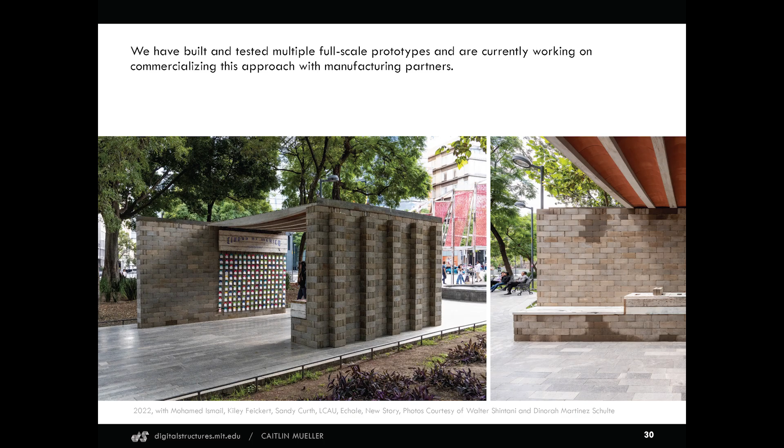This is a system that is a riff on a very traditional Latin American construction system for floors called Vigueta y Bovedilla, which is a block and beam system with precast concrete elements and some kind of temporary filler that gets a topping slab cast on to lock it all together.

The ingenuity of the system is that it's very lightweight and you don't need any heavy equipment to move any of the parts together. We decided to explore whether optimization could make it even more efficient, and we were able to save 50% of the carbon compared to a typical system.

The rest of this is compressed earth, stabilized block walls that our partner had developed, and the bovedillas are made out of a fired ceramic clay.

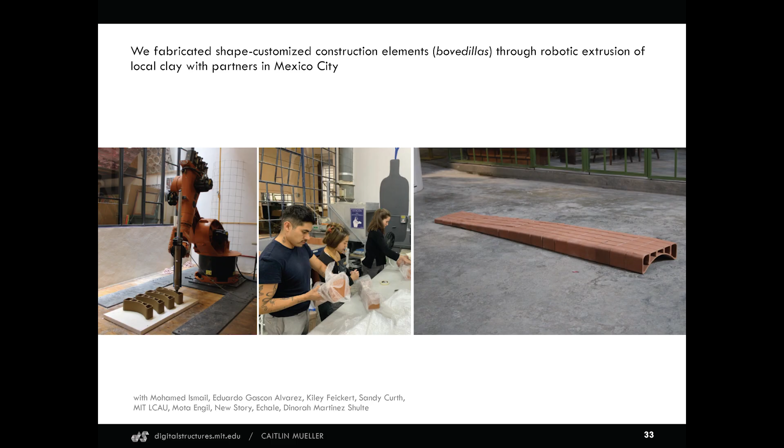They couldn't be made with traditional means because each one was different due to the shaped concrete, so we worked with a local partner, a local ceramics factory, to robotically extrude these different clay elements and fire them so that they could fit perfectly onto these shaped beams.

And here's the extrusion process that our partners carried out. So we were able to create this mixed material system that was dry fit together and worked on site.

The students who developed this project created a company called Forma Systems, where they're now trying to commercialize this idea. So if anyone wants to try this on a real project, this company exists and is eager to help you with it. Their primary business strategy right now is trying to develop software for precast manufacturers, but if anyone else wants to do this, they're very eager.

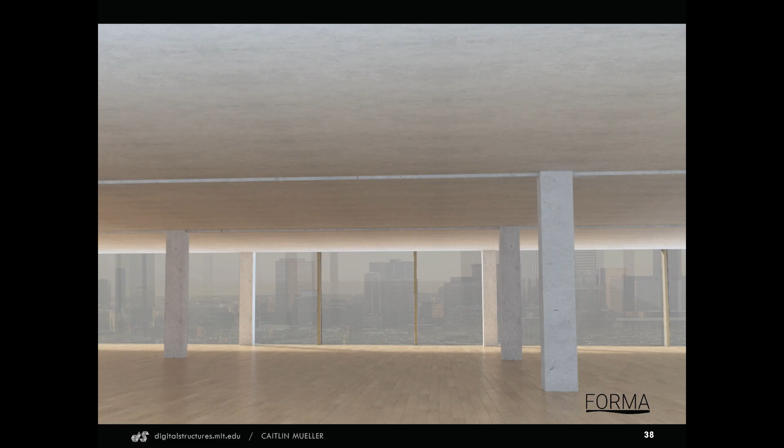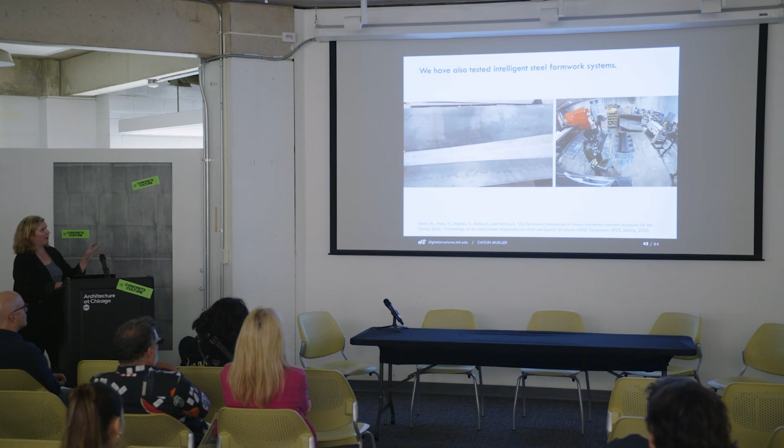The rebar is by far the slowest part of this process. Since I only have a few minutes, I'll just go quickly. We've still been doing more with steel. This is with the University of Arkansas with Emily Baker and Edmund Harris, who are amazing digital fabrication and geometers, who figured out a really smart and inexpensive way to make cold bent steel formwork, with Fishman making this mold, where we did another large-scale test at the University of Arkansas.

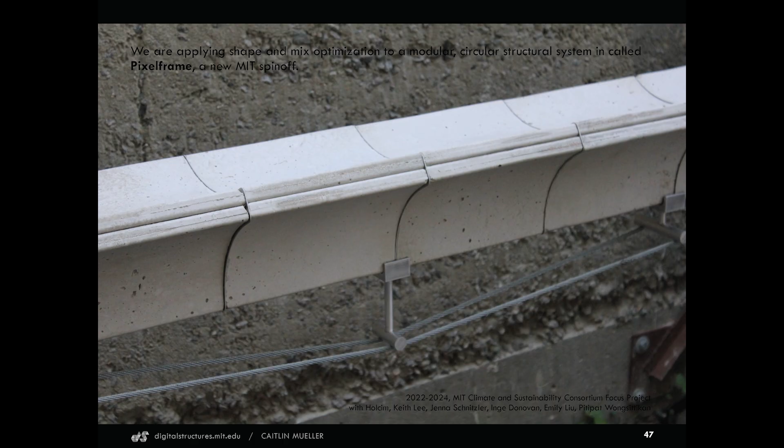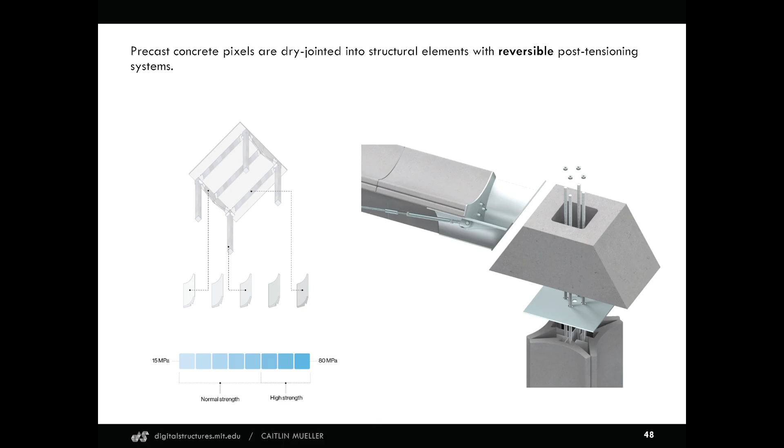Last quick project I want to show is another idea using less material, but also thinking about how to use it over and over and over again. This is a project called Pixelframe that my group developed with Holcim and the MIT Climate and Sustainability Consortium. It's a precast, post-tensioned, separable and reassemblable, not reinforced concrete system to make structural frames for buildings. There's no internal reinforcement, so all of the parts remain just concrete with a little bit of fiber reinforcement. And the idea is there's a single unit, the pixel, that's made at different strengths.

These pixels can be assembled into different components to make beams, columns, and frames. It's meant to be this kit of parts that is tracked and kept track of so you can use it over and over and over.

And there's a lot of emphasis here on beauty and value and aesthetics. We're trying to turn this from something people think of as garbage to something that's jewelry, where all of these parts are really beautiful and desirable and inspire people to want to keep track of them and keep their inventories of them, the same way that they do with higher value things like electronics today. These are really high-tech pieces of technology that are assets to care for and treasure. At least that's what we're trying to say here.

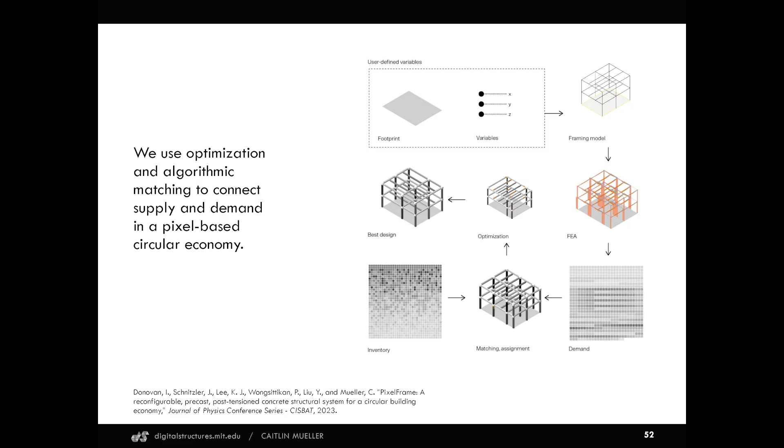Behind this is a complex computational system that helps us keep track and allocate things. And the idea, again, is these pixels circulate between industrial settings to cultural settings to, this is an adaptive reuse proposal.

The very last thing, another project in the same vein, thinking about waste material, looks at concrete rubble in the same way and says, can I take concrete rubble that's literally garbage? This was from a project in Bahrain where there was a lot of mid-century concrete projects being taken down, and use the heterogeneity of the rubble productively.

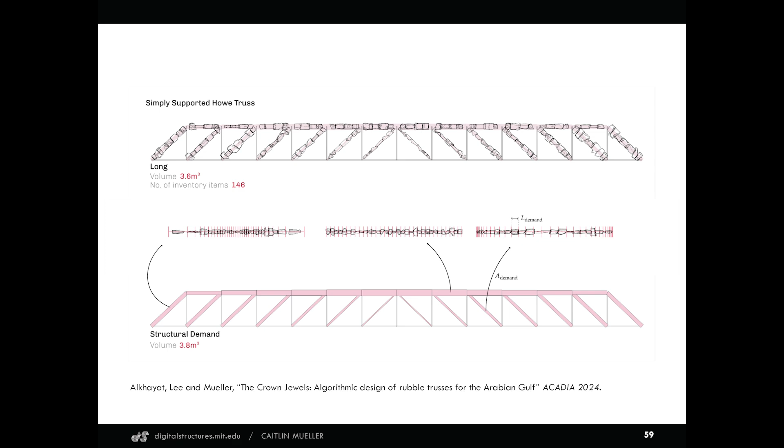Here, post-tensioned elements are put together to string as beads to make compressive elements on trusses. I love trusses, I love optimizing trusses. But normally in a truss you have variation of forces, and it's really hard to materialize that to make every element different. Here that comes for free from the variability of the material. So where we need thicker material, we use larger pieces, and we have this algorithmic matching process that enables that.

Latifa Alkhayat, who's led this work, is really also pursuing this from a representation and cultural perspective, where these are some of her Instagram posts showing this. She's working with local labor in Bahrain to start assembling these types of pieces and really promoting this transformation of concrete garbage to concrete jewelry, which I think is really exciting.

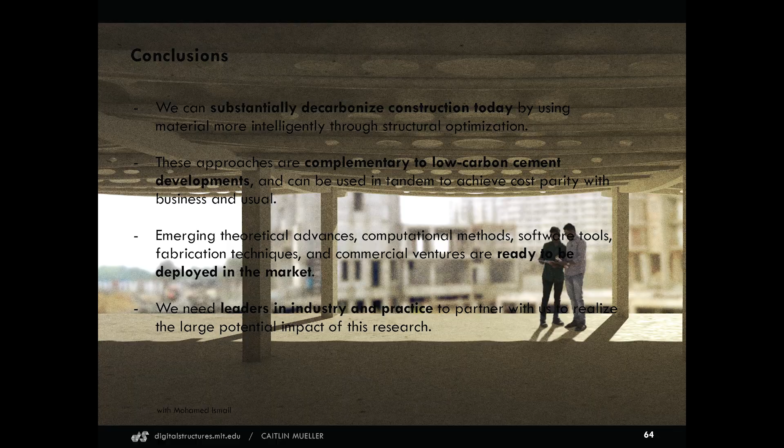So to conclude, I think we really need to focus on decarbonization. I think concrete is a really important lever, not to eliminate, but to rethink. And there's a lot of creative opportunity here for us to contribute. Thank you very much.

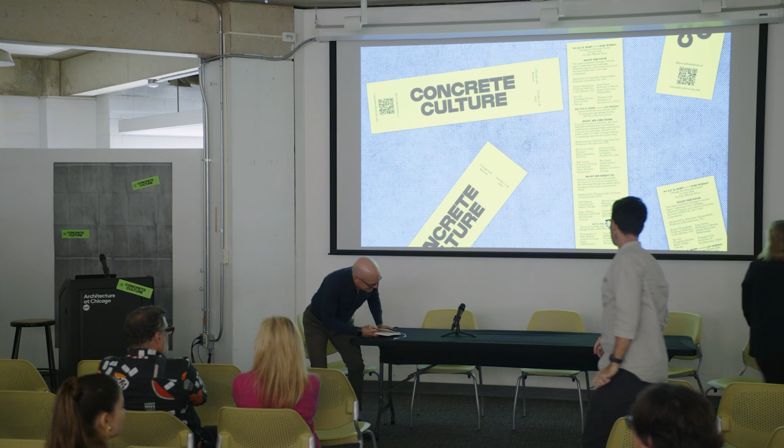Thanks to all of you. That was as thought-provoking a panel as I've seen in a long time. And it makes me think about a number of things. I think to try to draw a very broad conclusion, what impresses me most is the kind of agility that the material has in all of your research and experience.

I think about the image of the laboratory, or the kind of very refined algorithms, Caitlin, that you're using, and then to think about a concrete floor in Mexico, or a sack of concrete that is used by a family over a period of years to build a house. And it's the same material, but it's able to be used in these different contexts that go from jewelry to something that is clearly handmade, probably with no sense of the kind of art of concrete, but kind of getting it done and being able to use the labor of the family. I can't think of another material that would do that, right? Even brick requires a certain skill. So I have a number of provocations that come to mind.

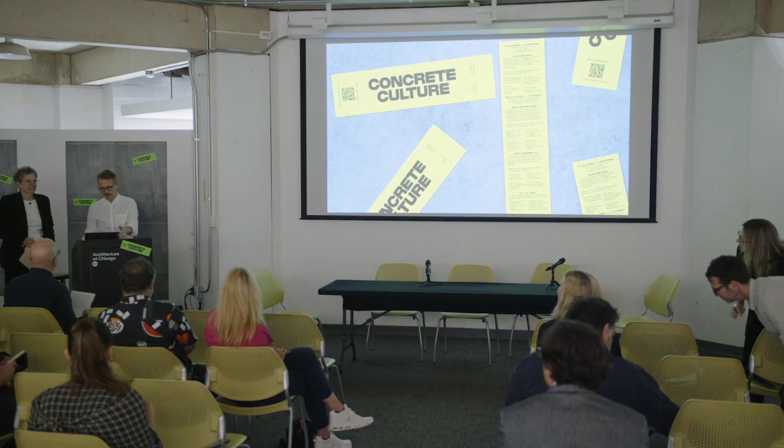We actually have zero concluding remarks. I looked at him and I was like, yeah.